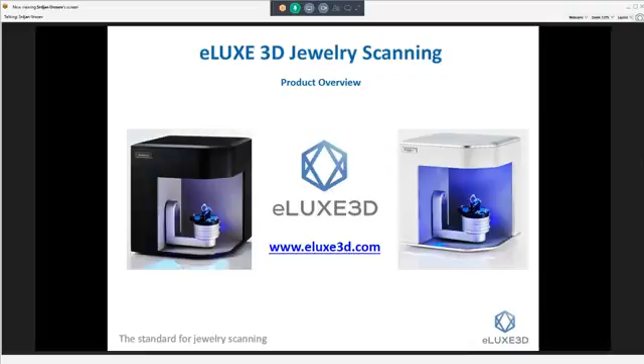So for those of you who are not familiar with three-dimensional scanning, the two primary forms of 3D scanning are laser scanning or structured light scanning. Laser scanners tend to have a sweeping red or a blue or maybe even a green line that's automated or sometimes manually operated with some sort of an external coordinate measuring machine, usually a fixed line that sweeps along the part, and that acquires point cloud data, which is ultimately turned into an STL or polygonal model.

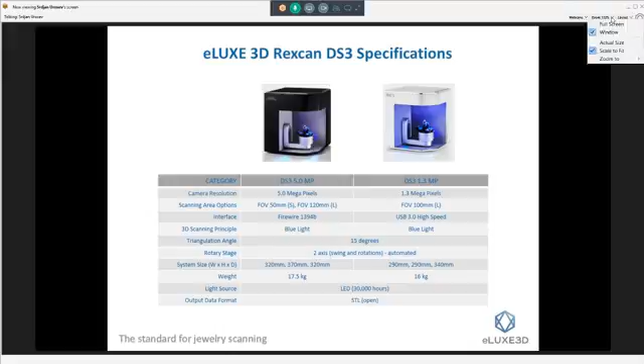Our technology is a little bit different as it works in a structured light fashion, so it's a megapixel based system. It works just like a digital camera. So your iPhone or your traditional digital camera is a 5 megapixel, 10 megapixel, maybe a 40 megapixel system that acquires images in 2D. Our technology has the same principle and philosophy behind that, but it collects images in 3D.

So what that means is we're able to project a fringe pattern onto the object, and the two cameras that are looking at the fringe pattern are defining the resolution and gathering the data in a three-dimensional fashion. So we don't have a lot of moving parts. The only moving parts within the scanner are the platform of the swing that rotates and has a fully automated swing. So you'll see this live in just a minute.

The two systems that we currently carry commercially are the Rexcan DS3 Silver and the Rexcan DS3 Gold. The primary difference is in the resolution. The Silver system is a 1.3 megapixel system, and it is a USB-based system, collecting 1.3 million points per shot. And DS3 Gold is the 5 megapixel system, a very high resolution, collecting 5 million points per shot. With that, you can kind of see some of the technical specifications.

On the DS3 5-megapixel system, we have developed two different versions. We have a 50 millimeter field of view and 120 millimeter field of view. We initially had just a 120 millimeter field of view, and when I say field of view, what that means is how large of an object the system can see within a single scan. So 120 millimeters is the maximum, for example, on the large field of view.

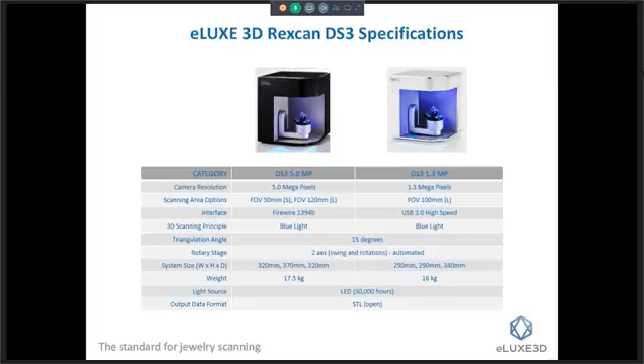One of the advantages that our systems do carry is that we have an open STL platform, so we don't lock you into specific software that are out there, but don't necessarily have any digital models. So this gives us the opportunity to provide you with a digital model of some of the precious stones or precious pieces that have a lot of history behind it.

Custom fit wedding bands is a very popular one. This process has taken a 3, 4, 5 day process down to less than a day process. In 3 to 5 minutes, we're able to capture a perfect 3D model of that engagement ring, which gives you the opportunity to build that wedding band with a perfect fit. It really saves on the iterations of 3D printing and design iterations. So it's something that's becoming very popular.

3D heirlooming, digital heirlooming, again, another format of use for our technology, and having old existing pieces that may have been passed down to family members within the generations of families now can be replicated or can be actually stored in a digital format, as you know, they have some family history behind them. So it's something that a lot of our customers are doing.

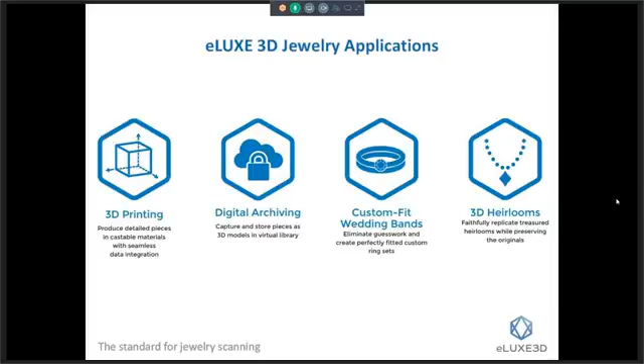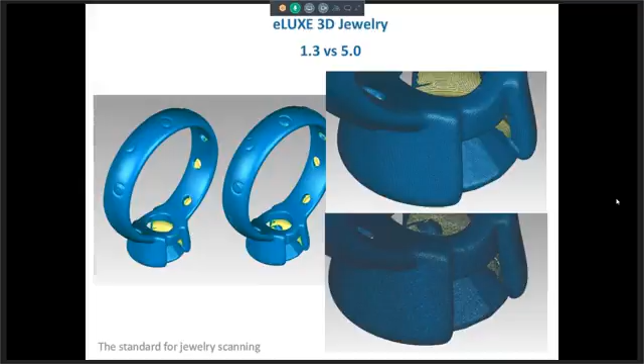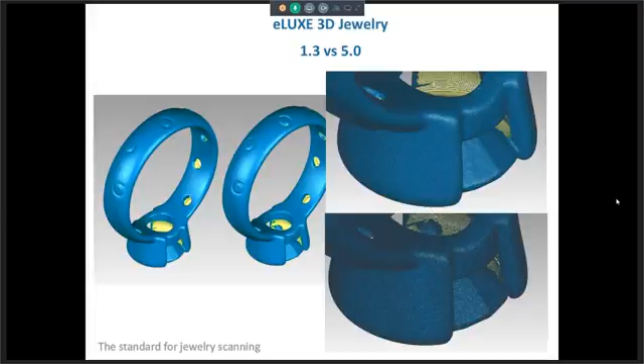Again, to us that have been around the scanning industry for a very long time, this is something that we can clearly see. But to somebody that's just looking to acquire data very quickly for template purposes, for design purposes, the 1.3 megapixel system is a great system. So you can kind of see the correlation between the two data sets.

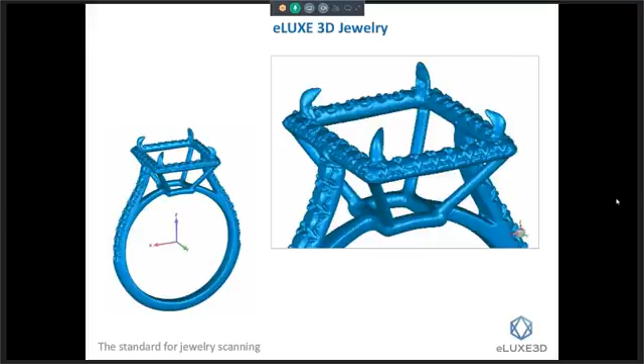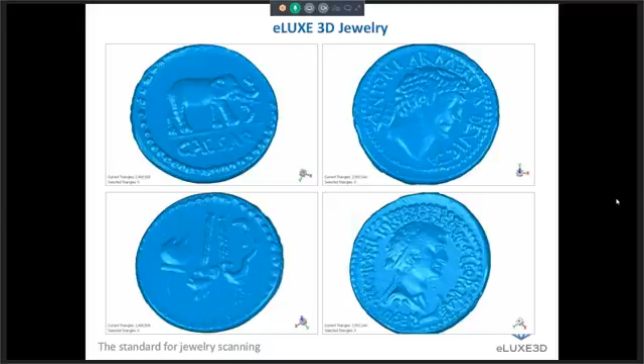Some old coins that were scanned in. Again, the detail is really something to pay attention to, because it's preserved very, very nicely in a polygonal format.

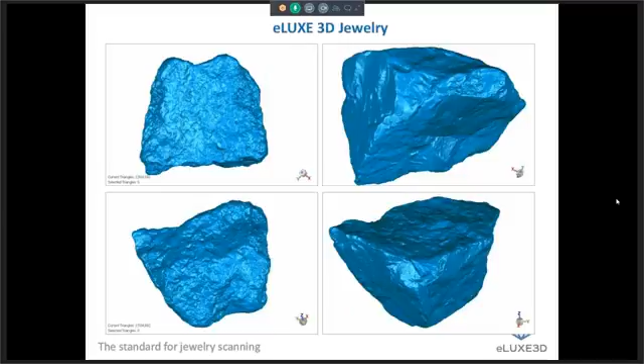These are actually just basic stones, if you will, but just wanted to show the actual capability and how much detail we're picking up. If you did have some sort of an irregular stone that you needed to design around, we understand it's a very difficult process with some traditional calipers and tracing methodologies, but we have the ability to provide a very detail-rich model for you to work with in your CAD packages. Again, some 3D printed glass rings, a key, just some samples.

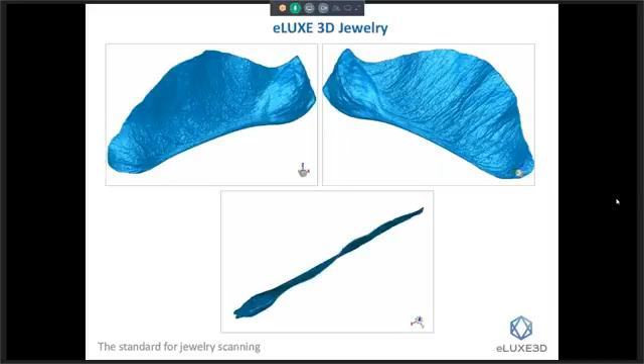This was kind of a cool project we did for a local university here. They just wanted to see if we can scan, this was actually one of those helicopter leaves from a maple tree, just to see what kind of detail we're able to get. So that is showing both sides of the actual leaf. You can see all the veins in it very crisply. This was done with a 5 megapixel small field of view, 50 millimeter field of view. So it kind of gives you a real world scenario of what the capabilities are.

And of course, adding any sort of accessories to existing commercial products, that's kind of a big market for some of you out there. The ability to take an existing product that's been launched and design some accessories around it. This is just the Samsung watch, I believe, that was done with our 1.3 megapixel system scanner.

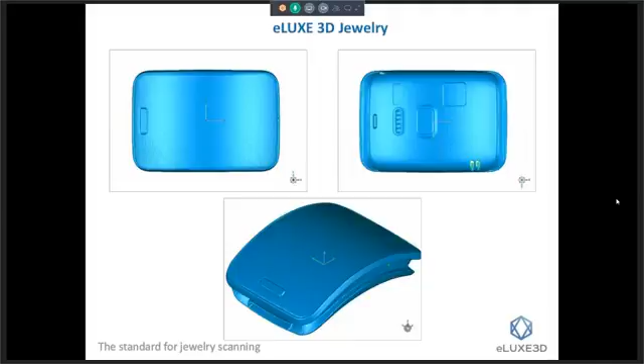So a lot of what we're talking about here is STL format-based. For our purposes at eLUXE3D, we are heavy users of Geomagic simply because we've been around it for a very long time. Geomagic Wrap in particular is a platform that we utilize for cleaning up STLs, for having the ability to fill in holes, extract features, and actually creating NURB surfaces. It's a product that's been around for a very long time and has developed a lot of great tools for being able to work with high-resolution STL models.

A lot of our customers use a combination of ZBrush, Rhino, Gemvision Matrix, 3Design, a few others that are out there. But we want to put enough tools in front of you to understand what you can and can't do with the technology and what the limitations are. Because if you think about how much data we're collecting, millions and millions of polygons, there are certain CAD packages that are not designed to be able to handle this type of geometry.

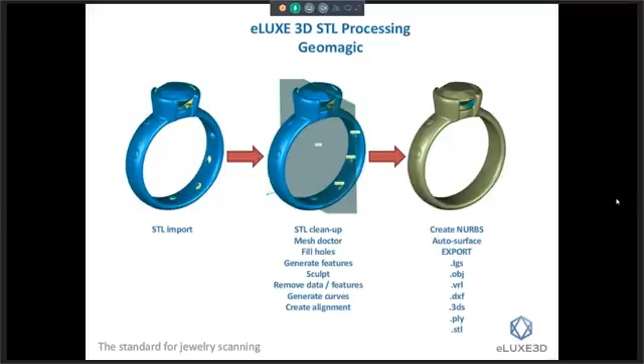So we're always working with our CAD suppliers, CAD vendors to improve on their processing side. But for our immediate need, our go-to product is Geomagic on the reverse engineering side and on the inspection side. As I mentioned, it has a lot of polygon sculpting and cleanup capabilities to get you that watertight model.

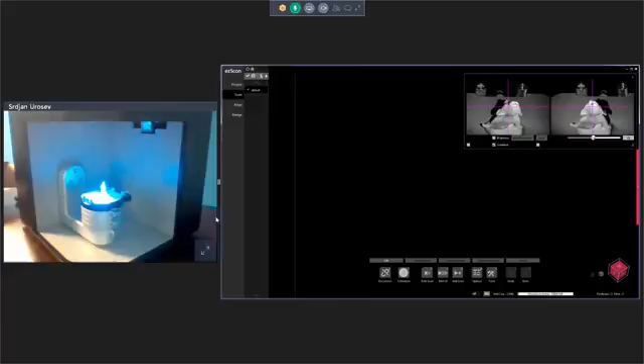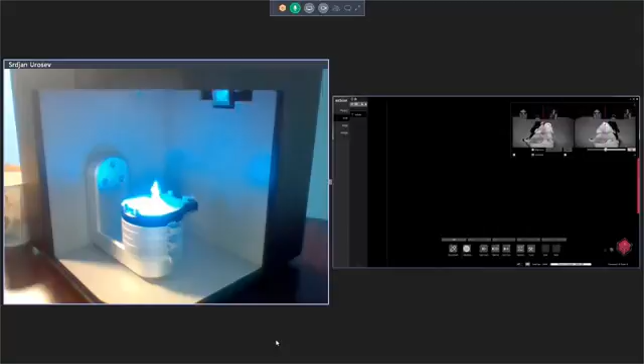Okay, we're back. Successfully was able to transition from one piece of software to another, so that's always a good start to the day. As you guys know, technology doesn't always behave perfectly, but I think you should be able to see a webcam showing the actual platform of the scanner itself, and then in the background, or depending on your layout, you can see our product in the software format that we're going to be using to collect the data.

So what we've done over the past couple of years is we've really focused on developing a software product and a hardware product that's very easy to use, very automated, that doesn't require a lot of technical expertise. eZScan 8 is a software platform that was recently launched in conjunction with the DS3 and the silver and gold systems, and we really were able to create a product that follows a process.

So just to show you a little bit of the layout and how this software is actually developed, on our left-hand side, we have basically our project tab, which is going to be our starting tab for starting a new project or opening up an existing project. And then we follow a process. We have our scan tab, align tab, and merge tab. We really want to create a process flow that your technical people are using as you're walking through the scanning process. So anything within your scanning capabilities that allows you to acquire data would be under your scan tab.

You can see this is a live feed. The left and right cameras are actually live right now. So if I do put my hand in there, you can see that it's actually picking up the data live. This little pendant that we're scanning is a little puppy. It's about an inch in height, so it's relatively small. It has some detail on it, and this is what we'll be working with today.

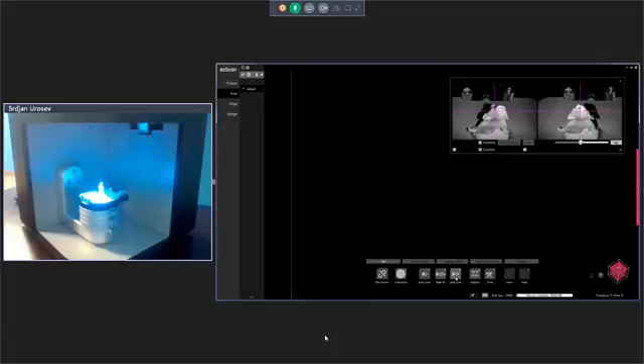We have what's called auto scan, which we're going to be running. It's just a string of macros. We have a next 10 button, which is unique to our technology, where the software automatically calculates the missing areas in the scan, and it will generate the next 10 paths. Or we have what's called add scan, which is just an individual scan. So if I click on add scan here, the system is going to move to the position that we're looking at currently, and it's going to take a single shot.

And there's what we're kind of seeing on the screen from one orientation. Now you can tell that we've scanned some of the platform. The fixturing that we're currently using is just some putty. The system does come with a ring jig. It comes with a full fixturing setup. But anything that'll just kind of fixture your object in a permanent orientation can be utilized to hold it in place. Your object cannot be moving independently from the swing or the turntable.

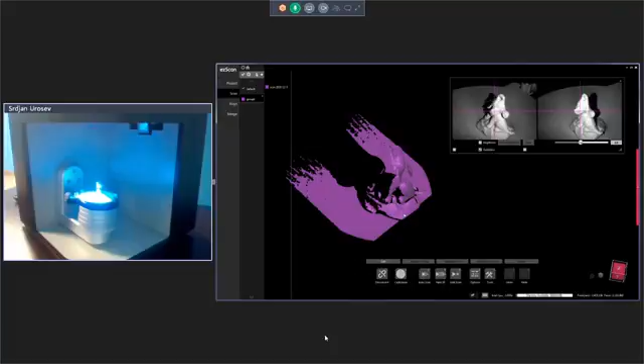So what happens during the calibration process, we actually create an internal coordinate system that's saved within the calibration file. So every time we move this swingarm, it knows its previous position and it registers the data together. So one nice tool that I like to use here to avoid scanning some of the turntable or the platform, we're going to turn on what's called a clipping plane. I may be getting into some of the technical aspects of the software, but it's kind of nice to show. So what I'll do is turn on our virtual clipping plane.

I'm going to drop that clipping plane to right about there, and then we're just going to go ahead and hide that. Now as I run our macro, we're going to delete anything that's below that plane. So it really saves a little bit of time in cleanup and processing. So I'll go ahead and delete this group. And instead of doing an individual scan, I'm going to run through what's called an auto scan. This is basically a macro of, I think, 12 to 14 positions for demonstration purposes. So it's really hands-off.

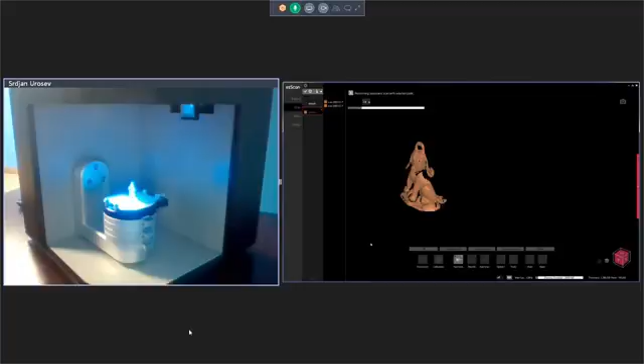You set the part down, you fixture it, hit the play button, and let the software do its thing. There's no registration that has to be done on the fly. Everything is done automatically as far as scanning is concerned. Looking at our left-hand side, we have a group 1 that's being created. As we're running this macro, the software automatically creates a group, and within that group you can see scans being populated. So we have scan 1, scan 2, scan 3. It basically follows with a date and timestamp, but those names could obviously be changed if needed.

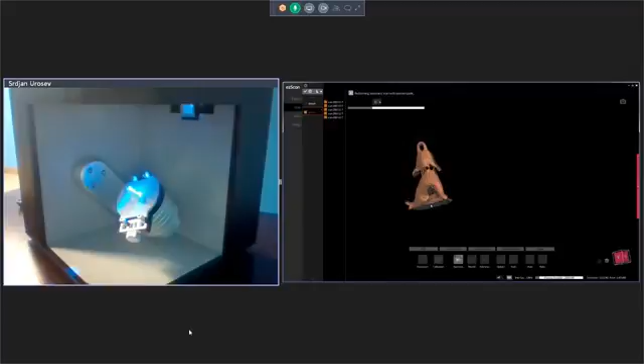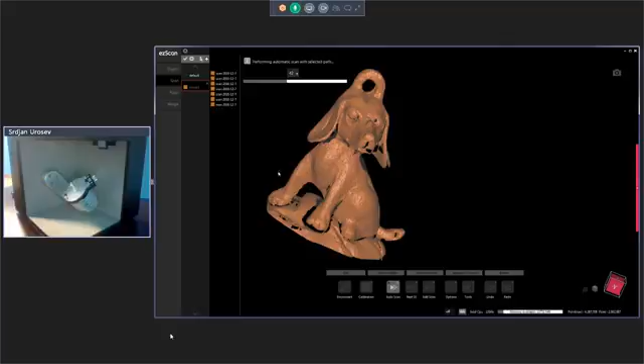So we're scanning live right now, as you should see on the screen. This puppy being populated very, very quickly. I'm going to zoom in a little bit so you can see some of the detail. There are some waves in the actual design of this piece. The eyeballs are some sort of tiny little stones, but this orange peel that you're seeing on the puppy is actually on the object. This is not scan noise. This is actually detail that was designed into our piece here.

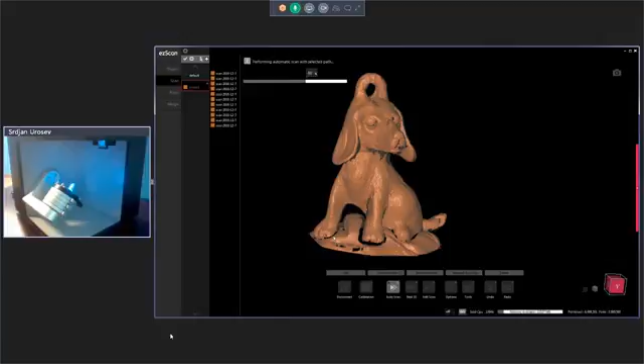So we'll let this finalize, and then I'd like to walk you through the full process, what limitations we have with the system and what we need to do in order to have a full 3D scan that might be watertight. Because as you may know, non-contact scanning is line of sight based. What line of sight means is that what it sees, it will scan. So if I gently rotate this guy upside down, you can see we're going to have some missing data simply because the scanner can't quite see that location underneath.

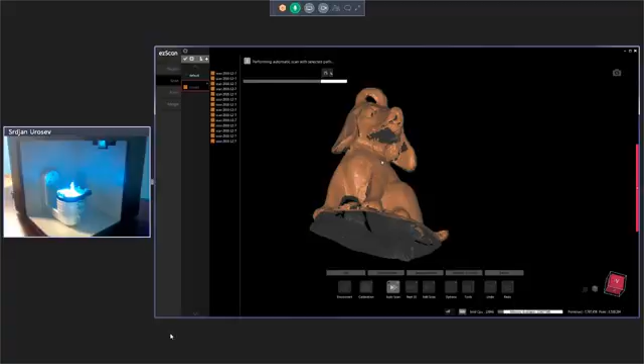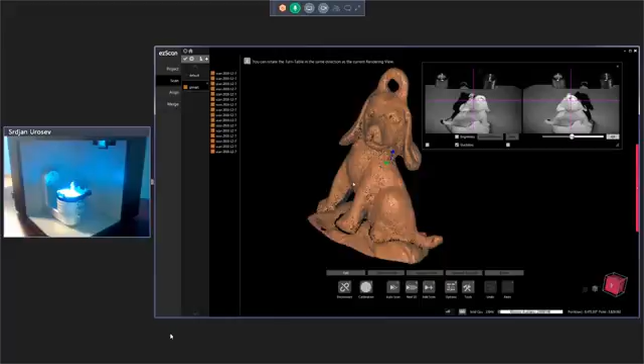So some very high detailed rings that have pockets or holes that are not visible in certain orientations, the scanner might have a hard time seeing those. But with multiple orientations, we typically are able to gather most, if not all, of the data. But that's just something for you to understand: we're not seeing through the actual physical object. We don't see through stones. It is line of sight. So once... exactly.

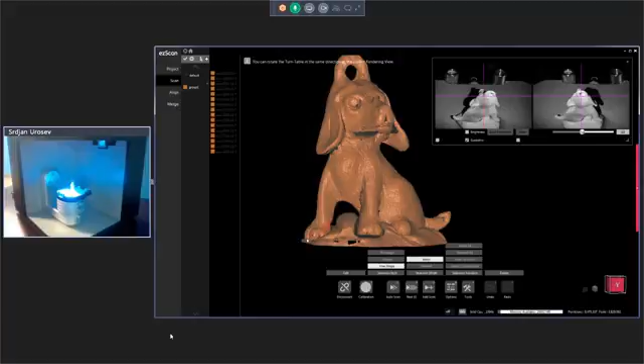So quickly, at this point, I'm going to delete some of this putty, or the fixturing, if you will. I'm going to turn on my edit command and use a free shape select. I'll just select the areas that I don't need and delete them out. And if I touch on a little bit of our actual part, our puppy here, it's okay, because next we're going to flip this puppy upside down, collect the rest of the missing data, and then walk through an alignment process.

So again, we're doing this live. There are no tricks behind what we're doing. We just want you to understand the full capability of the product.

Very easy workflow. If you do put down the product for a couple weeks and you turn it back on, it's not something you have to reach for the manual. It's something that you will pick up automatically. So, which was kind of our key in trying to develop and streamline this process.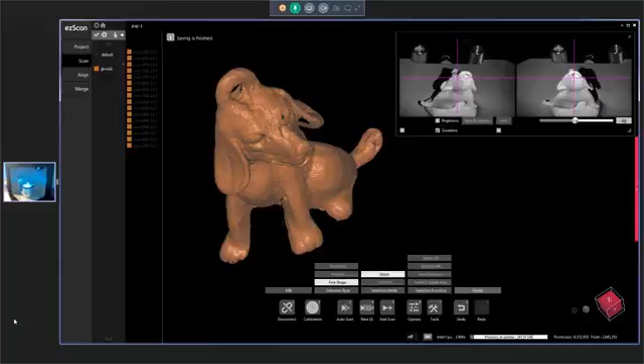I'm going to do a quick save as here, and we'll just call this Pup 1. I get in a habit of saving quite often, as you typically don't like to lose work, and in case there's some sort of a crash, you always have your file saved.

Okay, so here's what we're going to do now. We have our group 1, which has probably 85% of our scan, but we are missing a little bit of this guy on the bottom. So what I'm going to do is I'm actually going to remove this platform from our scanner, from our jig, and I'm going to take this puppy off, and I'm really doing this live, so please be patient with me. We're going to just flip them upside down and fixture them back in.

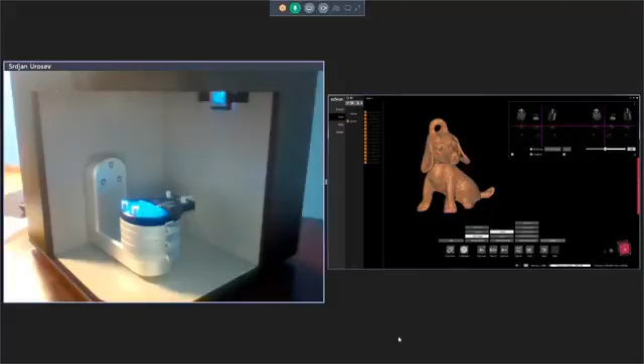One thing I should have mentioned, which I didn't, we do add a little bit of spray on the object. With scanning technology, if it's very shiny, reflective, transparent, translucent, you do have to spray the object down a little bit, right? So it kind of takes that shine and reflectivity off. It's very common with most scanning technologies out there. We have several different forms of spraying down the object, whether it's a 3D scan spray, whether it's a mixture of a washable paint and an airbrush kit, and that's something we will definitely walk you guys through as needed.

So right now I'm going to flip this puppy upside down, and I'm going to add just a little bit of spray to it. Obviously you won't be seeing that portion, but trust me, that's what I'm doing. Make sure I've got him fixtured in so he doesn't move. Okay. You might be able to kind of hear the spray in the background a little bit.

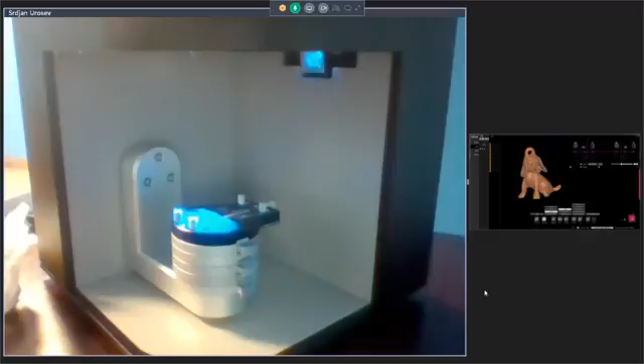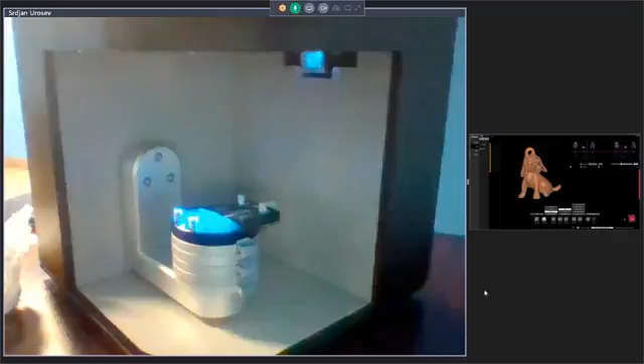And this spray that I'm using is actually a 3D scan spray that's developed by a company out of Germany called Helling. It adds about 3 to 5 microns of spray depending on how much texture you put on it. But it's a very, very fine spray that does not take away from the detail of your object.

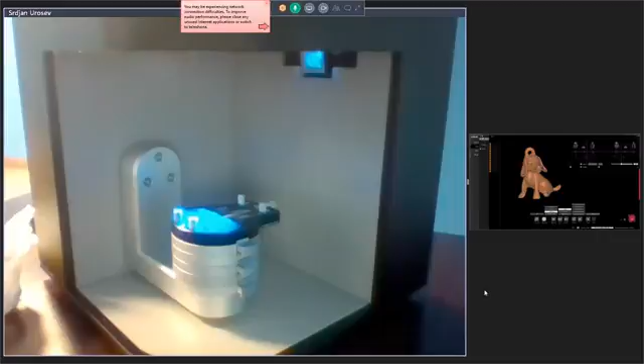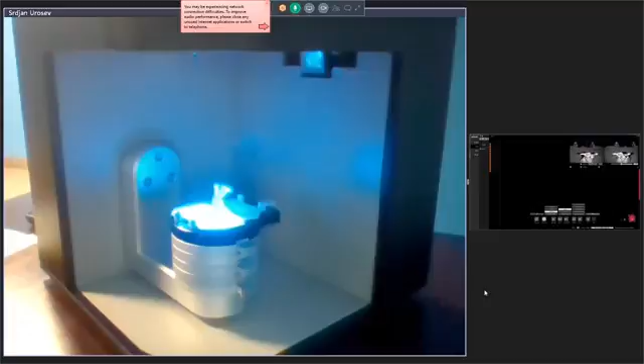Okay, I'll go ahead and drop this guy back into position. Tighten up our fixture. And now you can see our cameras are seeing a different view, different orientation. So at this point, I'm just going to go ahead and click on the auto scan button. Actually, you know, at this point, what I'm going to do is I'm going to take one scan because I'd like to predefine my clipping plane again.

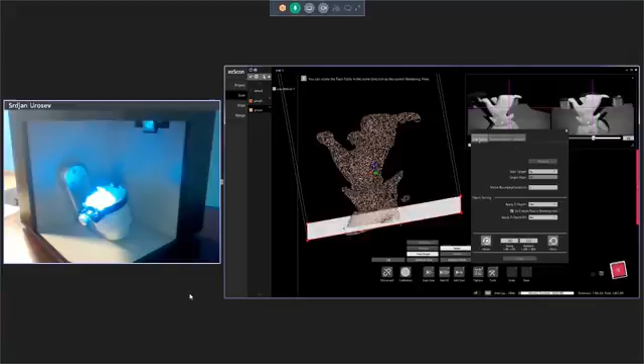And in order to predefine that clipping plane, you want to have one scan on the screen so you can kind of see where you're trimming with the virtual clipping plane. Otherwise, you might be taking away from your object. So I'm going to go back into my options, turn on my clipping plane, and you can see that I can definitely bring this up a little bit. And we're good there. I can delete group 2, and then I'm going to run auto scan, same macro.

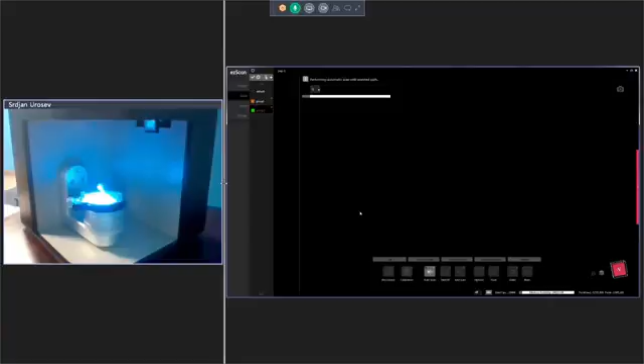So the macros are basically kind of embedded in the product. You can create your own macro, and all a macro is a string of positions, a rotation and a swing. It's an XML file that could be edited. It could be generated within the tools and the options that we provide. It could be edited in just a notepad or some sort of a comma separated value format. But all it is multiple orientations and a swing in position. Once the actual swing moves, the scanner takes over and takes a picture.

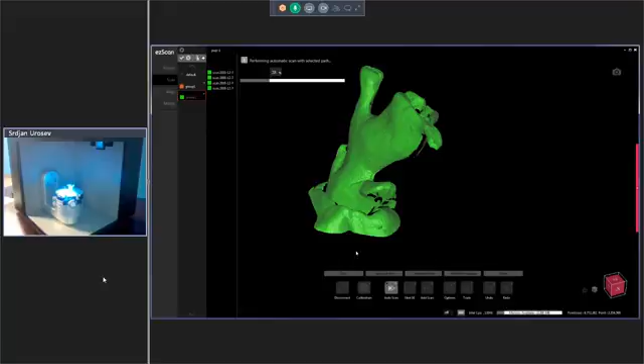And now you can see we're kind of filling in the blanks. I'm running the same exact macro as we ran for group 1. As you can see, on the left-hand side here, we have group 2 that was created, and all the individual scans that fall within group 2. Our next step is going to be to take group 1 and group 2 and align them together. And this is something we're going to do in this product as well. So as soon as this is finished, we'll clean up some of the areas that we don't need, and we'll align them together.

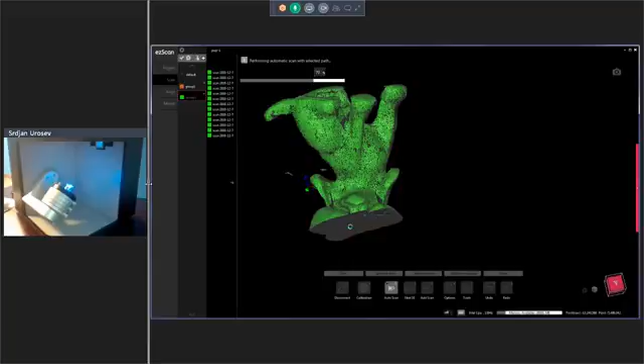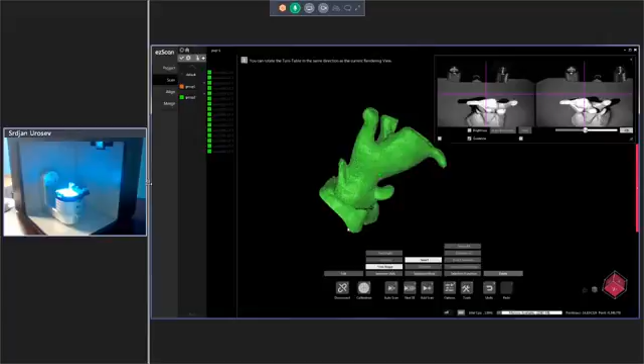All right, looks like we just finished the last scan. We're going through a quick global align. And there is our group 2 scan. Again, I'm going to go into our editing and just kind of delete some of this noise that was picked up during the scanning, whether it's the platform, some of the background noise. I am going to zoom in and nicely trim around this putty.

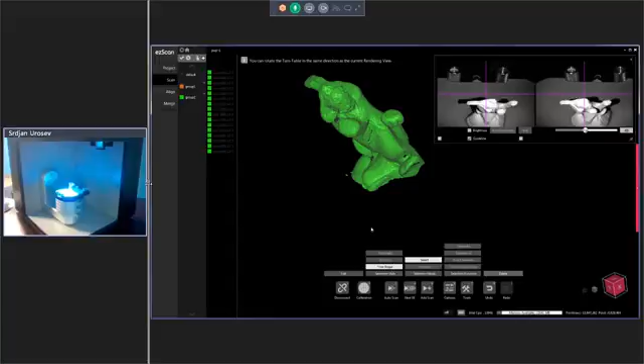And again, this putty is just one of multiple forms of being able to fixture the object down. Hot glue is used quite often. Our customers have developed some of their own fixturing systems. The system, as I mentioned, does come with a very nice ring jig. It's basically a mini vise with some rubber padding on the inside, so it doesn't really deform your object. Again, the goal is just to fixture the object in an orientation that will prevent it from moving during scanning.

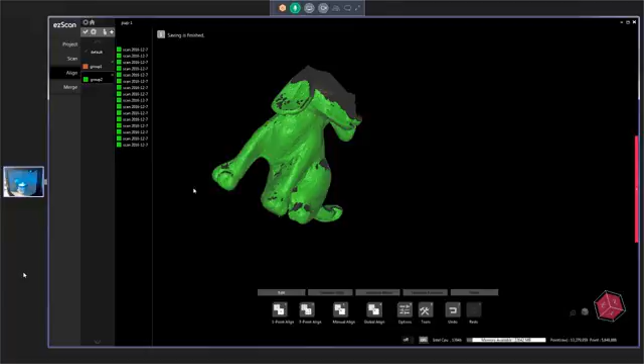Okay, so now we have the bottom portion of our puppy scanned. To play it safe, I'm going to do a save as and overwrite the previous file. So we have that saved. Yes, we'll overwrite it. Now that our scanning is complete, we're going to go to the next phase, which is our align phase. So as I click on the align phase, our cameras disappear. Now our icons down here at the bottom also change, and now we have a couple forms of alignment that we're going to be able to work with.

I'll go ahead and turn on group 1, so you can see that we have 2 groups of scans that are in different orientations. And then we have a couple different alignment options here. We have a 1-point alignment, a 3-point alignment, a manual alignment, and then a global alignment. These are very standard alignments that you guys may have seen in other CAD packages. So 1 point is most common that we use. It's a very nice form of alignment. You just click on one common point and the software will take over.

3 points will allow you to pick 3 common points. Manual alignment will allow you to just rotate one of the objects on a screen manually. And then a global alignment is basically a curvature-based global registration that we'll do as a final step to ensure all the individual scans are globally registered.

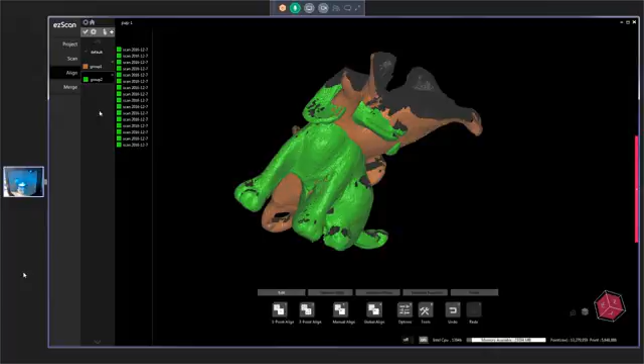So what we do here is we click on the group that we want to move. So I'll make group 2 as my movable object. I'm going to click on that, and I'll click on 1-point align. This breaks up our screen into 3 orientations. We have our blue, which is our movable, which is in the upper right-hand side. We have our white model, which is our fixed model, which is in our lower right-hand side. And then on the left side, we have our blue and white showing us what the actual alignment is going to look like when done.

So with the 1-point align, the only thing you have to be concerned about is that you have these objects approximately in the same orientation in 3D space, right? So I basically have the puppy approximately aligned in the same orientation in both views here, and we're going to click on one common point. So I'm going to click on kind of like this little neck area here. This point is approximately there.

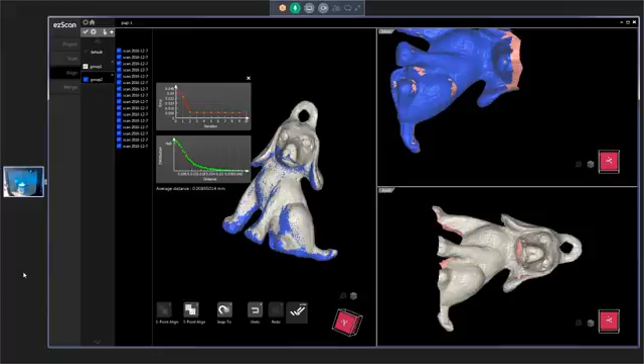The software takes over and then looks for the overlapping information, and if you can kind of see on our left-hand side, based on our view orientation and the common curvature between the two, it snaps them together very, very nicely. It gives you a little bit of a distribution chart here, giving you an error and the distribution deviation, how much the actual objects have moved when aligned. So we're within about 8 microns is the average distance along all these scans. We'll click enter, and yes, we want to apply those changes. So now if I look at my 2 groups of scans, they overlap quite nicely.

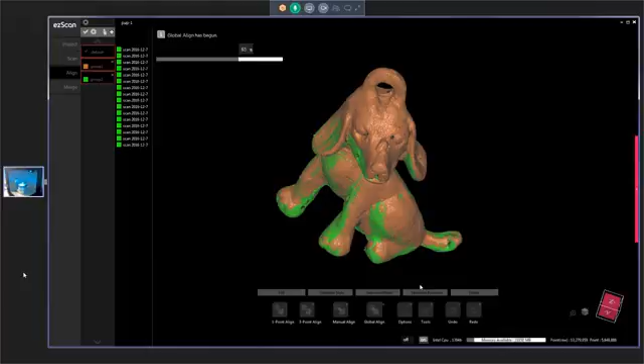One final thing I like to do is do what's called a global alignment. So we just did an alignment based on individual groups. I'm going to click on this little finger up here, deselect all, and actually I'm going to say select all, and then click on global alignment. What global alignment does is actually takes over all the scans on an individual scan basis and does a final global registration, kind of bleeds through in case there was any vibration or in case I bumped the scanner or bumped the desk or something of that nature. It just tightens everything up.

So you can see that we went from approximately 8 micron distance down to about 3-4 micron as the average distance between scans. And you can see the colors, how they bleed through in a format that tells me that this is a very good registration and I'm happy with it. So at this point, we're going to go ahead and save this again.

And then we're going to walk through the final step, which is our merge. So we're going to go to our merge tab. And merge is basically exactly what it states. We're going to merge these objects into one individual STL. Right now, they are still all based on 2 groups with about 15 or 16 scans in each group. I'm going to go through and select both of these groups, click on the merge object, and then we have some tools here to work with.

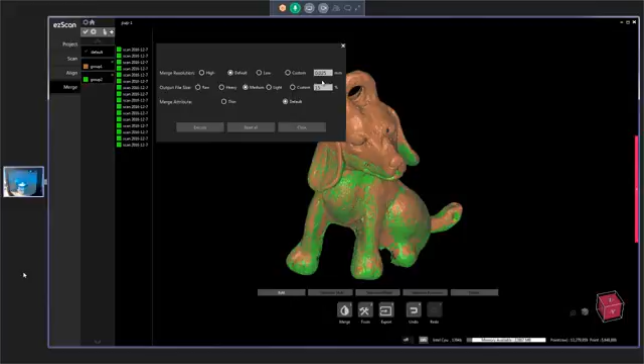Some of the tools that we select or predefine are strictly based on our merge resolution and file size. File size is linked to how large of an STL you'd like to have. So the way this works here, for example, my default merge resolution, or the triangle edge length or point distribution, is about 25 microns, which is pretty good. Most printers, you guys are printing at about 10, 15, 25 micron settings, so that's pretty good. And then output file size is going to be a medium.

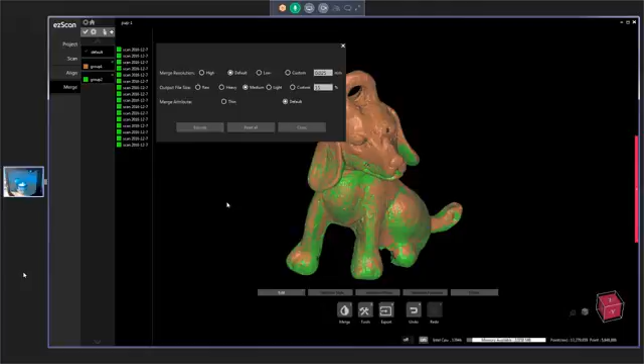So we're going to decimate this from approximately, if you look in the lower right-hand corner, 13 million points; we're going to get rid of approximately 65-75% of that data. So still keeping the resolution of our data intact, not losing any detail, but really minimizing how large our file size is. And you can input a custom value here as well based on percentage. So we'll just go with default and medium. We'll go ahead and execute that. We'll say yes because we have saved this. And now it's going to take a minute or so, or hopefully less than a minute, to merge this together.

In case you guys are wondering what kind of machine I'm running on, I have an off-the-shelf HP ZBook with Windows 7 with a Core i7 processor. So we do need some power, some horsepower, between a laptop or a desktop. We do run on Windows 7 or Windows 10. But something that's off the shelf, that you typically run your CAD system on, would be sufficient to run the scanner. Graphics card is important, good processor is important, and obviously the RAM distribution is relatively important.

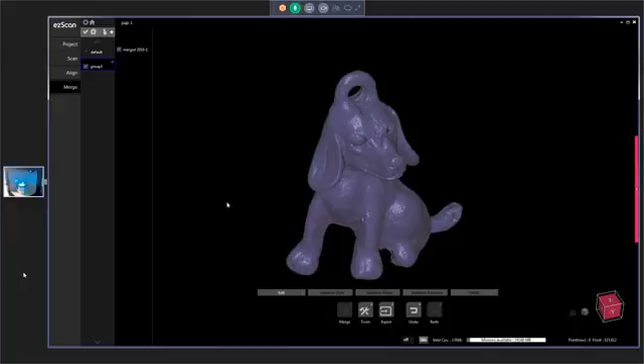Yeah. So one reason I like to save the files as I go along is obviously unexpected crashes every once in a while do happen. So you want to make sure you preserve your work. Second of all, once you finalize your alignment and you have gone through the merge step, you can see that now we just have one group and one file. So we've merged all of those scans together. And you can no longer go back and add scans, right? So we're actually now going to export out an STL or an OBJ file in this phase.

If you ever wanted to go back and add additional scans, you really have to do it on the raw metadata file, which is an extension of MDT. That's our raw file format, and that will allow you to add additional scans, additional orientations. So with file management, as our customers get familiar, they typically save the raw file format and export out the STL file. Once they're happy and working on the STL file within their downstream process, you can go back and delete the original metadata MDT file with all the raw information.

So in a nutshell, that's basically the process of scan, align, and merge. At this point, we're going to say export, and I'm just going to say export STL, with OBJ, PLY, a couple different formats. We'll drop this on the desktop again. And that will bring us to an end of the demonstration.

There are additional tools that we didn't cover in here, some of the advanced tools I mentioned, like creating your own macro settings. We do have some decimation tools in here, for example, just to walk through some mesh repair tools: smoothing, deleting of clusters, decimation, manual hole filling. So we do have some tools that will allow you to massage the data or clean up the data once the scan is complete and once the merge is complete. But it's just part of some of the advanced training that we'll walk you guys through in the future.